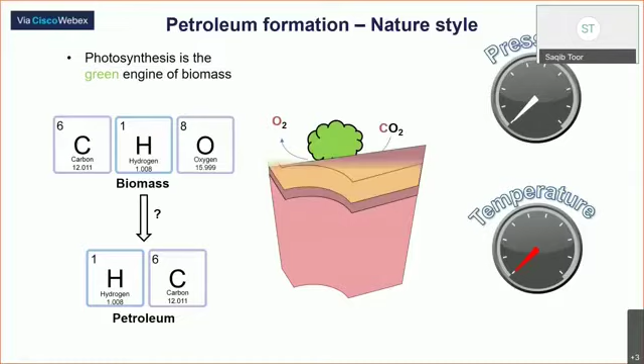And you know all these biomass and dead animals, since billions and millions of years before, going underground into the layers of the earth crust. So then pressure and temperature increasing, and all this stuff converted into the fossil crude, which we are drilling nowadays. So we are going to mimic the same process, but we are not going to wait for the millions of years. So we will do it in the reactor system to convert such biomass into the biocrude. I will tell you in the further slides how we will do this one.

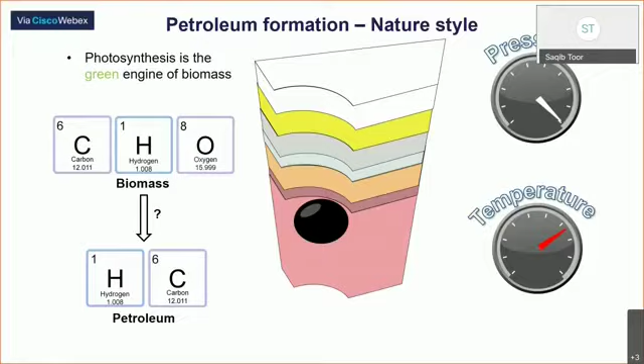For example, the bagasse from sugarcane, sawdust, black liquor from the pulp and paper industry, slaughterhouse, animal waste, and municipal solid waste. I know from the news it's a big problem in Pakistan, especially in Karachi. We have a lot of municipal solid waste, and nobody knows how to handle this one. We can use it in a good way to convert into good biofuels, but definitely it will take time. It needs research, but we have to think right now how to convert all these things. So we are minimizing the waste and we are getting a good product.

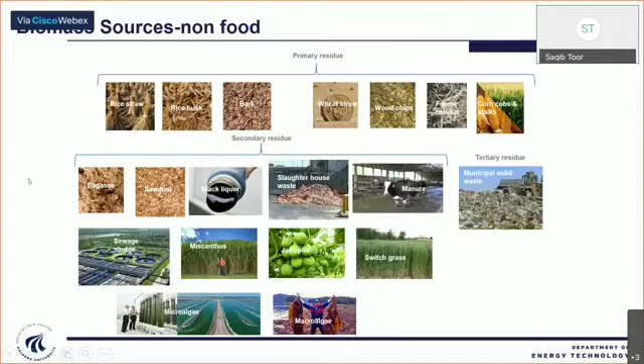Then we have sewage sludge, miscanthus energy crops, jatropha, switchgrass, and microalgae. So we have many agricultural and non-agricultural residues and wastes. And all these biomass and waste, they are different in chemical nature. So if the biomass belongs to crops, then definitely you have cellulose, hemicellulose, and lignin with different percentages. But if it belongs to, for example, the slaughterhouse waste or microalgae and these types of stuff, then we have protein and also the fat.

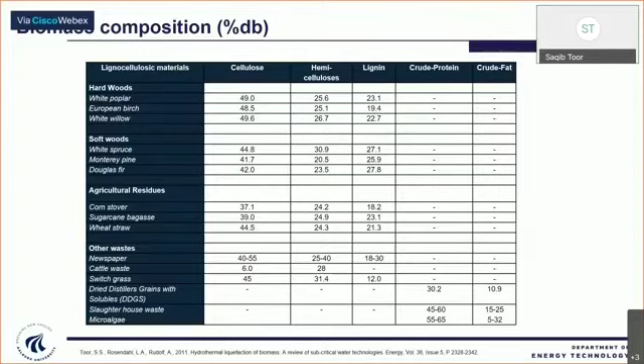But all these things are good because we are going to convert these cellulose, hemicellulose, lignin, protein, and fat into our biocrude. They are the main monomers, for example, glucose and fructose and protein and the fats, which will convert into the biocrude. So no first generation biofuel. Just imagine if the world airline fleet used 100% biojet fuel from soybean, and soybean is a food product. I am just giving you the scenario.

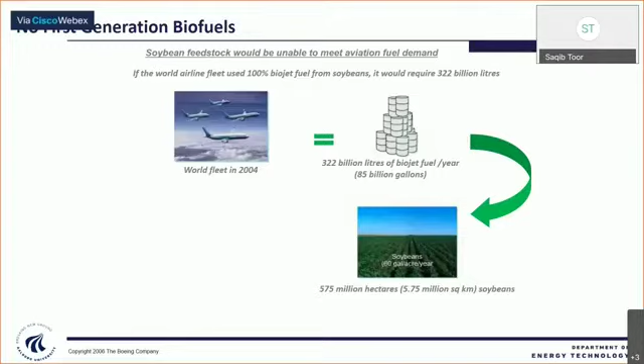So then you need 322 billion liters of biojet fuel every year. So how will you produce it? You will definitely cultivate the soybeans. That is a food commodity. So then you need 575 million hectares for the cultivation of soybean. So I just give you the size of this land. So it will be almost the size of Europe. So to produce 100% biojet fuel, you need a land that is the size of Europe to cultivate the soybean, so that you can fulfill the demand of your 100% biojet fuel.

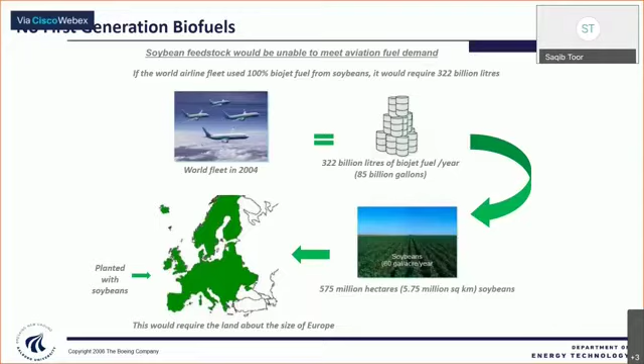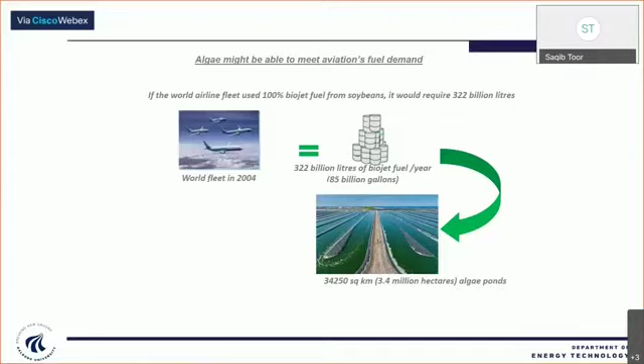So this is from the food. So this is the drawback of the food. You need the land, and an enormous amount of land you need. But if you talk about the algae, that is not the first generation. It's not the food. It's the second generation. And if you need the same amount, 322 billion liters of biojet fuel, you need only 34,000 square kilometers of algae ponds, and it will be the size of only a very small country in Europe, that is Belgium.

So you can see a huge difference in how much land you need if you are going to grow soybean to produce 322 billion liters of biojet fuel. But if you are using the non-food like algae, you need a very small amount of area. You can produce in raceway ponds like this one, or you can also produce indoors in photobioreactors. So this is a big difference between the first generation and the second generation, if you are going to supply such kind of biojet fuel.

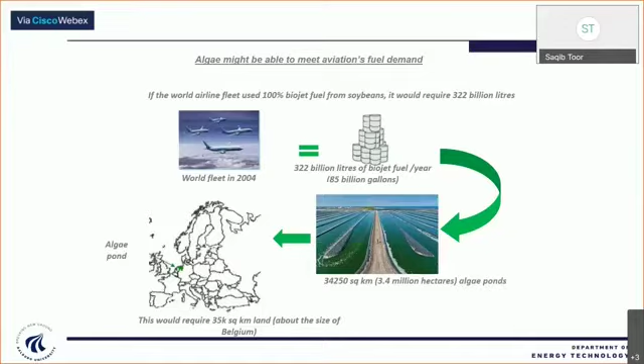Another bad thing about first generation, if you are producing biodiesel and bioethanol, now people in Europe are also producing biodiesel and bioethanol from second generation, from the crop residue. But even if you are producing biodiesel and bioethanol from second generation feedstocks, they are oxygenated fuels, they contain a lot of oxygen, and oxygen is the enemy of the engine. We have to remove the oxygen from our fuel. Otherwise, you are going to blend a very limited amount.

So in the filling station, you can see B5, B6. So it means only 5 to 6% biodiesel or bioethanol, the rest is your fossil diesel. So if you blend too much, it will increase the engine NOx emission, stability and storage issues. It's hygroscopic in nature, so it absorbs the moisture from the air, thermal degradation.

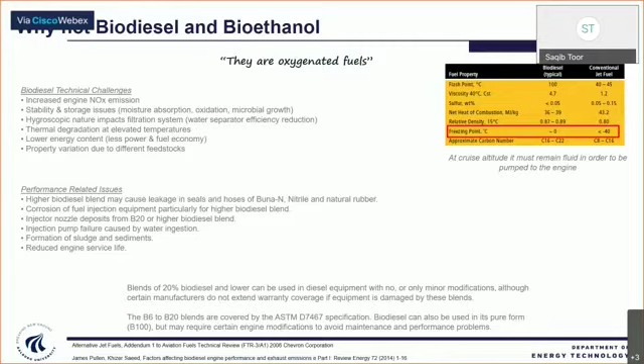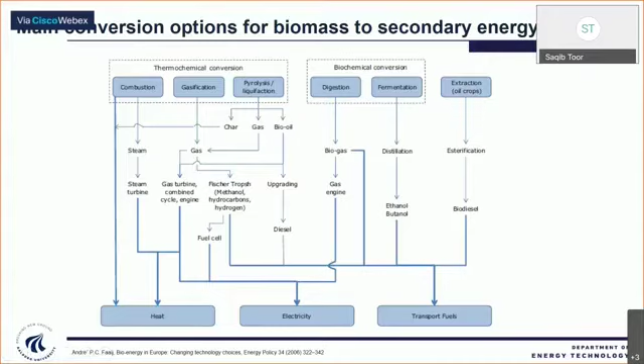But before starting any technology, there are some key issues from all parts of the technology. For example, feedstocks, technologies, then products. In feedstock, cost is very important: whether your feedstock is cheap or expensive, its quality, whether it can be converted into oil or into bioethanol or biodiesel, then also the availability, where you are getting it from, so all the transportation cost and location. Then if you are talking about the technologies, what is the status of the technology? Its capex and capital cost, operating cost, then yield, efficiency, scale, and how many byproducts you are producing. If you are producing bioethanol, what will be your byproducts to optimize the process, to make it cheaper.

Then you are getting a product. So what's the value of your product? Is there any need or demand in the market, and then competing routes. If you are producing biodiesel, maybe another company is also producing biodiesel or bioethanol. So what will be the competing routes? Then quality specification: is your biodiesel according to the international standards? Then green credits: is it really and truly renewable and sustainable? So all these issues we have to address before starting any technology, any feedstock, and any product.

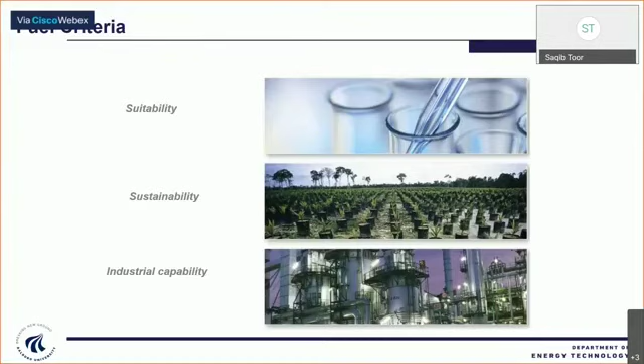And the last thing is industrial capability. Is your fuel really capable of being used as a drop-in fuel in the already existing infrastructure, and also the life cycle analysis of your biofuel. So this is the fuel criteria. If you are going to produce biofuel, we have to think about all these factors: suitability, sustainability, and industrial capability before starting any process for the production of biofuel.

So now come to the point of our hydrothermal liquefaction process. It's a high temperature and pressure process, a very effective technology. We can efficiently valorize different types of wet biomass feedstock. We can also use dry ones, but if we are using dry ones, we have to add the water ourselves. So we can use any lignocellulosic biomass, algae, organic waste, animal waste, sewage sludge, anything. Wet or dry, it doesn't matter. We perform this liquefaction process at supercritical conditions of water.

At supercritical condition, that is more than 374 degrees C temperature and more than 220 bar pressure, water behaves in a very different way. So it changes its properties. So at high temperature, at supercritical condition, due to the low density of water and due to high ionic product, it will prefer the ionic reaction rather than the free radical reaction. So we will get more and more liquid biocrude oil and very less amount of char.

And similarly, at supercritical condition, due to very low dielectric constant, most of the organics will dissolve in the water. So that's the beauty of the water at supercritical condition. That's why we are working at high temperature and pressure to convert more of the biomass into our biocrude. As I said, our main product is biocrude, then solid residue, then water soluble fraction. In that water soluble, we have short chain alcohols like methanol, ethanol, some acids like acetic acid.

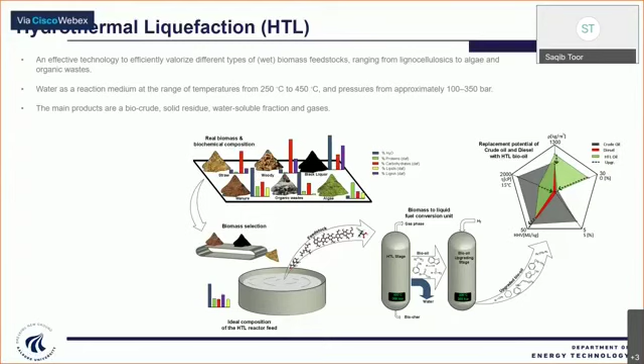So in the lab, we have all the instruments from lab scale to pilot scale. So for example, we take straw. It's a crop residue, from wheat straw, from rice straw. We make the slurry, almost 7 grams we put into the reactor. We connect all our capillaries and pressure transducers. Then we do the leak test. Then we connect all our transducers and thermocouples. Then we send it into our sand bath. So this is our lab scale setup.

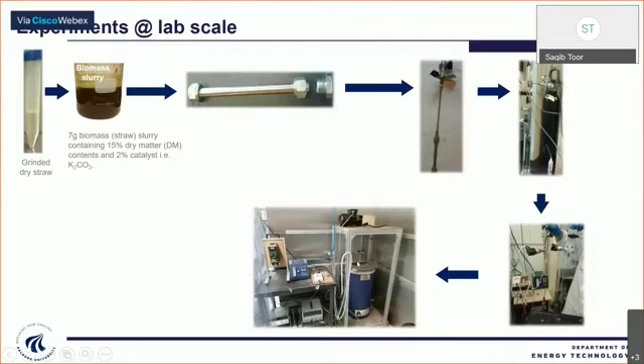So we tried all different biomass to see how much we can convert into the oil product. So this is preheated. We just hang our reactor here and shake it. And then after 15 minutes of retention time, we just remove it. And then we do all this process, you can see. So this is liquefaction. We collect the gas product. We do the gas analysis, how much gas we are getting. Then the collected product, you can see, will be like this, a black liquid. It contains water, it contains solid, it contains oil.

Then we do the filtration and we wash our reactor system with acetone, because acetone is a very good solvent to dissolve all the oil and clean all the stuff. And then we remove the solid phase, then drying. So this is our solid phase. You can see a very small amount of solid phase. Then we use the rotary evaporator. Then we have oil and water phase. Through the rotary evaporator, we remove all the acetone which we added ourselves for cleaning our system.

Then we use diethyl ether. Then we remove all the water phase here, and we have all the oil phase. So from biomass, we are getting the gas, solid, oil, and water. So we separate these on the lab scale.

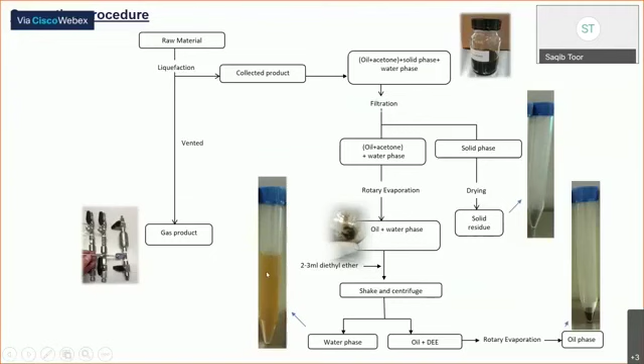We tried a lot of biomass feedstocks, barley straw, organic waste, then microalgae, aspen wood, then municipal solid waste, and grasses and wheat straw and lignin, and all these things we published. So we tried a lot of biomass feedstocks because, as I said, we have been working for more than 12 years in this technology. So that's why we also have the lab scale setup. We have a batch reactor.